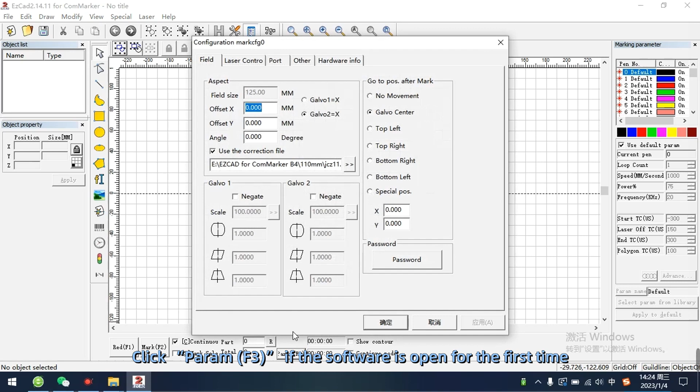Tick Use the correction file. Find the file ending with cor in the USB flash drive or that has been copied to the computer disk. Calibration of the software has been completed. The left side is the toolbar. It shows the function when the mouse is on the button.

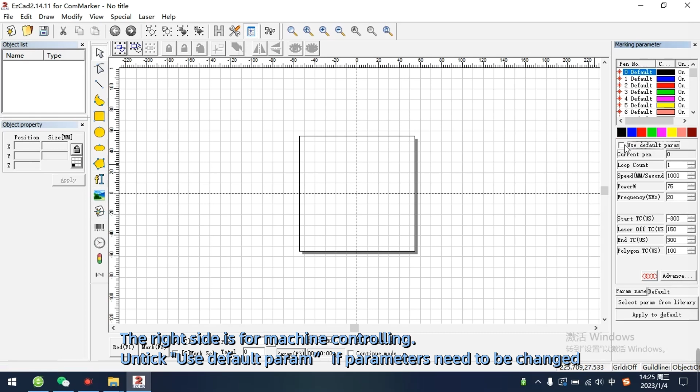The right side is for machine controlling. Untick Use default param if parameters need to be changed. We can modify the speed and power according to the engraving requirements, and other parameters do not need to be changed by default.

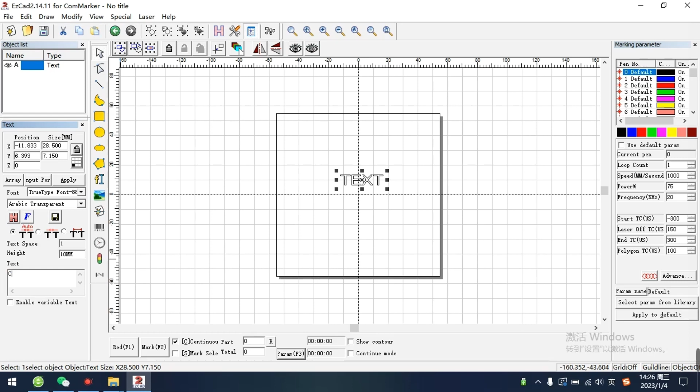Let's take text as an example for engraving. Input words in the bottom left corner. Do not forget to click the Apply button. Click the Put to Origin button if the text is not in the working area.

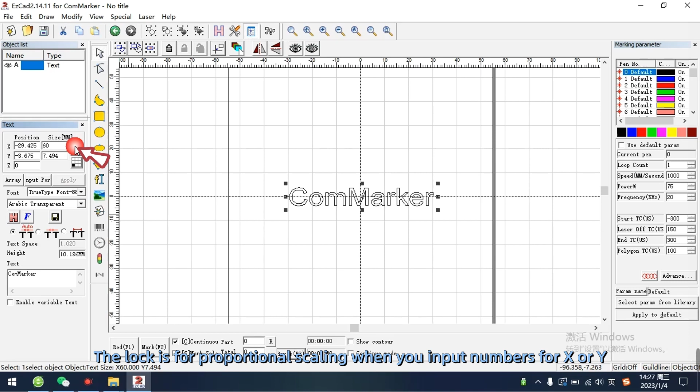The size can be modified here, and click Apply to change. The lock is for proportional scaling when you input numbers for X or Y. Font modification. The fonts are related to each computer system. Don't forget to tick Apply.

Make the text bold, italic, vertical, or change word spacing by clicking the F button. H button is for hatching the text. Set parameters for filling. Z-shaped engraving mode is commonly used with good engraving result. Line space is suggested to be input from 0.03-0.05 normally, which is determined according to the size of the text.

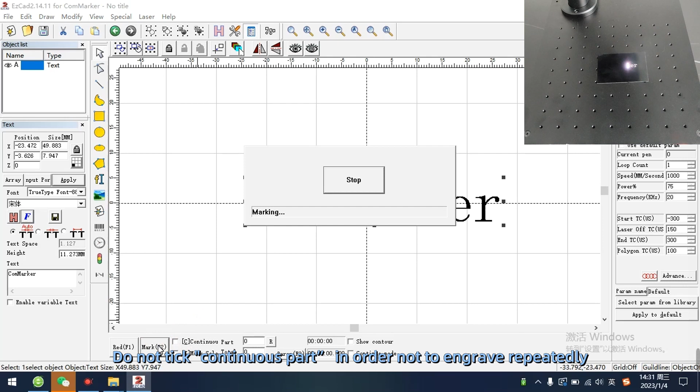Click Red to preview. The rectangle will be the marking area. Do not tick Continuous Part in order not to engrave repeatedly. Picture marking, click Draw bitmap file. It supports JPG, PNG, BMP, etc.

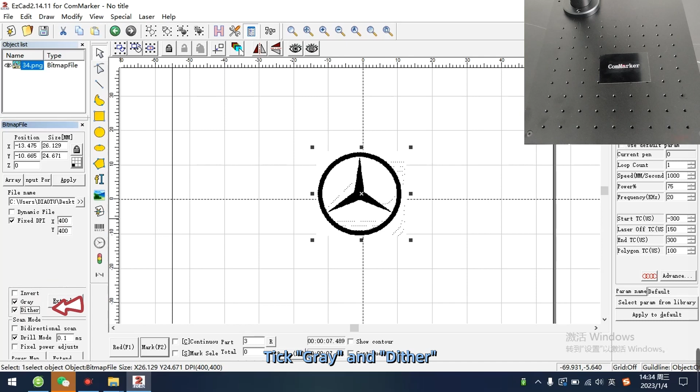Set the parameters for the picture file on the left side. First set the DPI, by default we can set X equals 400, Y equals 400. Invert the picture if necessary. Tick gray and dither. There are two extend buttons. Click the one on the top. The brightness can be increased to avoid black dots in blank areas being engraved.

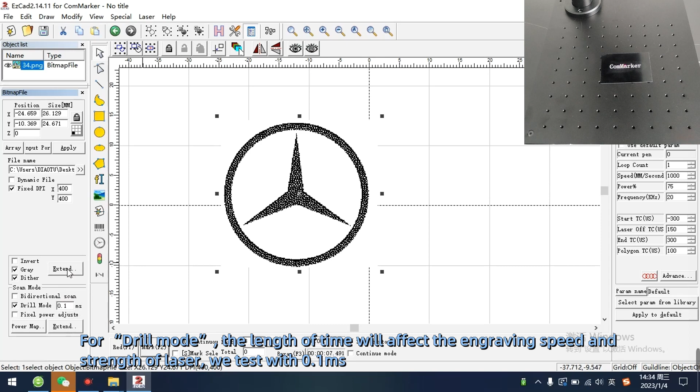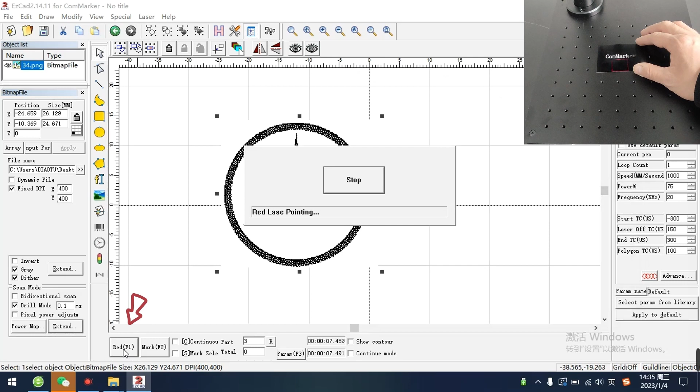For drill mode, the length of time will affect the engraving speed and strength of the laser. We test with 0.1 ms. If engraving a picture with a white background, it is needed to tick Disable Mark Low Gray Point and set the number 40. Click Red to preview. Click Mark to engrave.

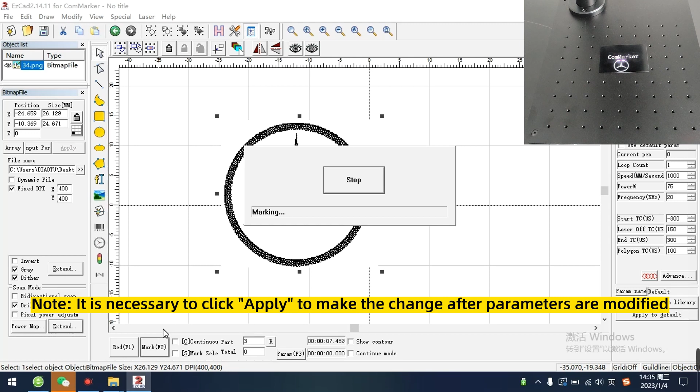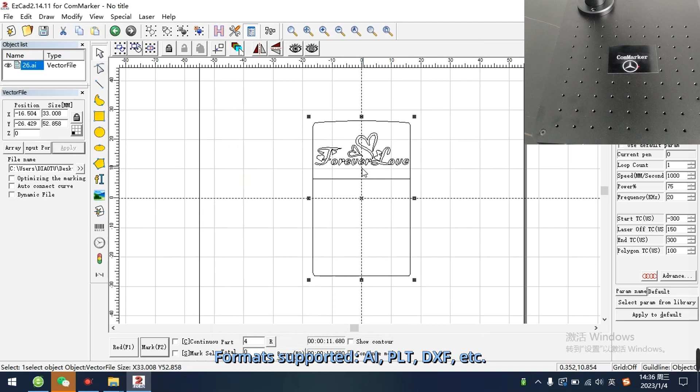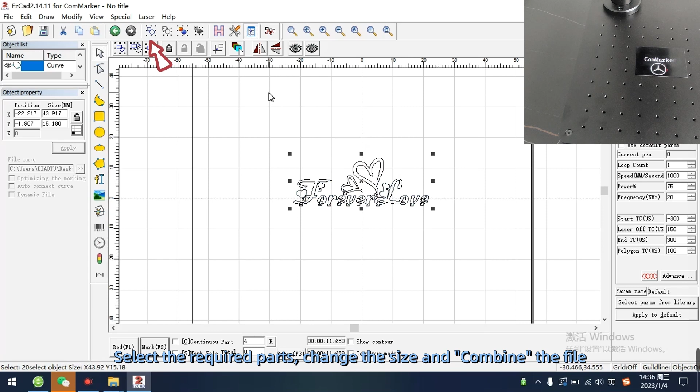Vector file engraving. Format supported AI, PLT, DXF, etc. Ungroup the file after importing the vector file. Delete unwanted parts. Select the required parts, change the size and combine the file. It also needs to be filled similar to text. Preview with Red and engrave with Mark.

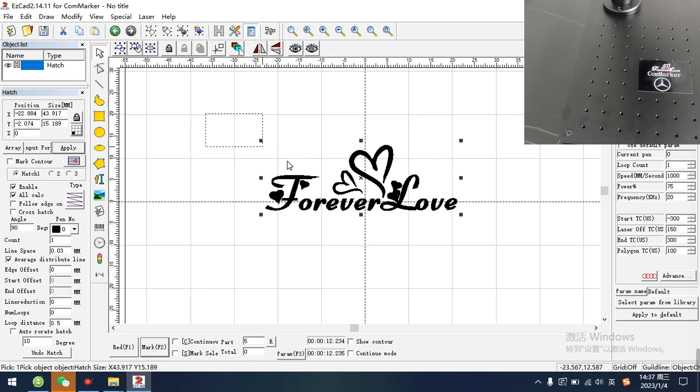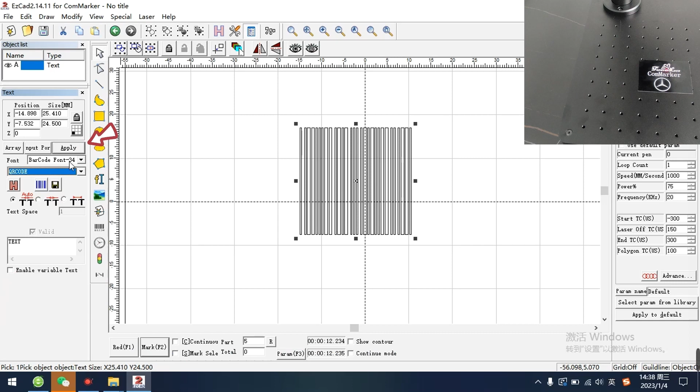Generate barcode or QR code. Select QR code, click Apply. QR code can be generated. Change the size if necessary. Click H to fill, same as text and vector file. Input the required content and click Apply. Click Red to preview, click Mark to engrave.

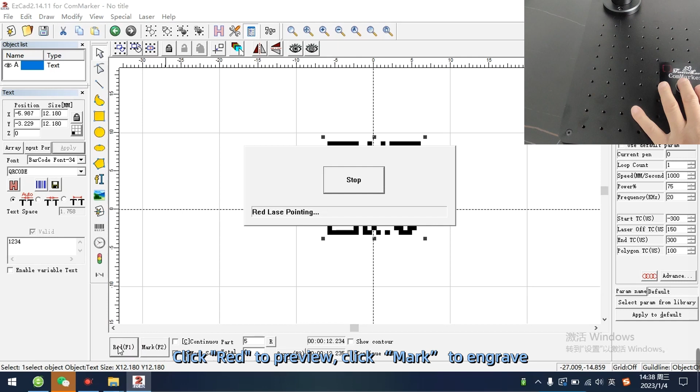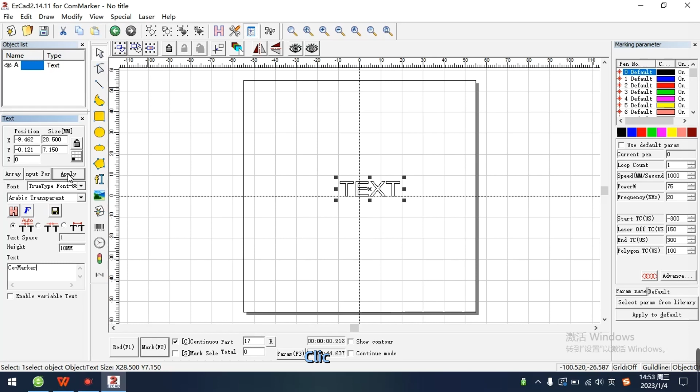Operations for the roller and rotary device. Take marking text as an example. Input a word, ComMarker. Click Apply. Place the text in the middle of the working area. Can drag and zoom the size, or change the size by inputting numbers. Fill with button H.

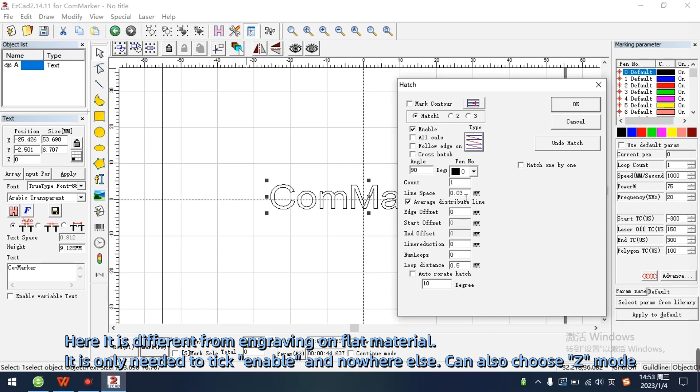Here it is different from engraving on flat material, it is only needed to tick Enable and nowhere else. Can also choose Z mode. Click Laser, select Rotate Text Mark. Click Param to set parameters, tick Rotate Axis. Use a ruler to measure the diameter of the object and input the number.

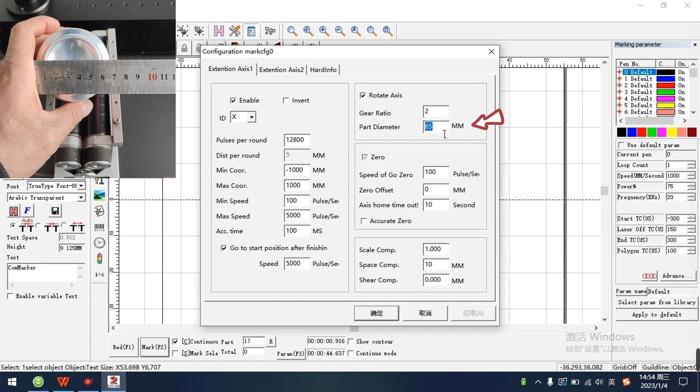Change the number of gear ratio, input a bigger number if the marking graph overlaps, input a smaller number if there are gaps. A small square appears after clicking. Red is the engraving area for a single character. Press the Esc key on the keyboard to exit preview. Click to start marking.

In order to better see the effect of the numerical change of gear ratio, let's demonstrate the following. It can be clearly seen that the space between each letter becomes larger.

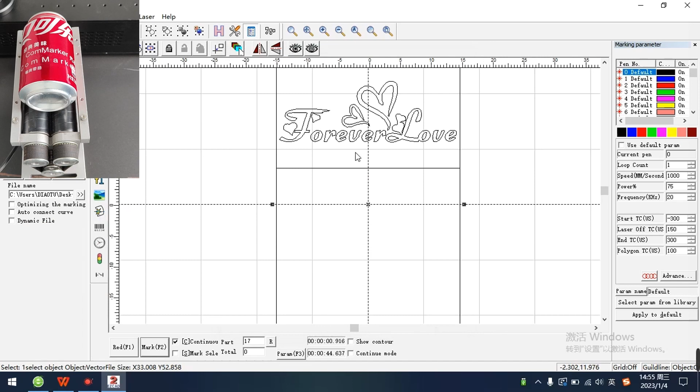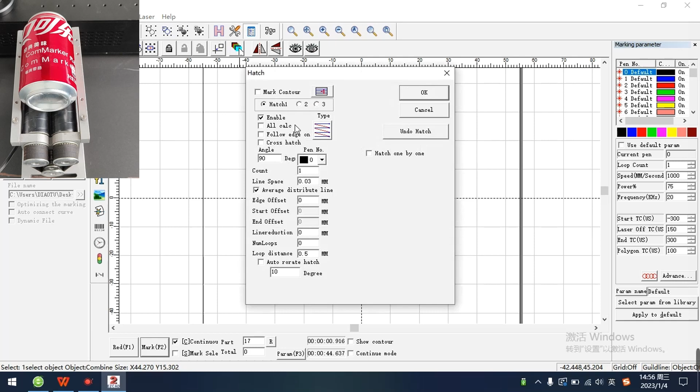Vector Graphics Engraving by Split Mark Mode. Firstly, open the file, ungroup the file. Delete unnecessary parts. Combine the file. Click H to fill. Parameter settings, tick Enable, the same as Rotary text engraving. Click Laser, select Rotary Mark.

Double-click to create a dividing line. The distance of the dividing line is determined according to the size of the object. Right-click to delete a line and drag with the mouse to move the line. It is needed to tick Mark by Split Line with this method.

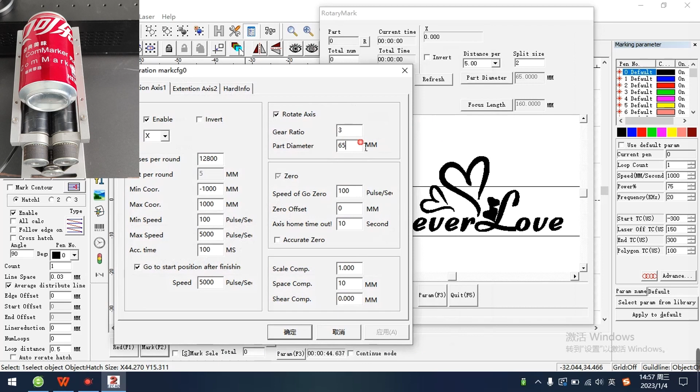And there is another way to control rotating by ticking Split Size without putting dividing lines. With different numbers input in split size, the results of engraving distance differ. Click Param, input the diameter number of the object. The size of overlapping area or gap of the engraved picture can be changed by changing the gear ratio number.

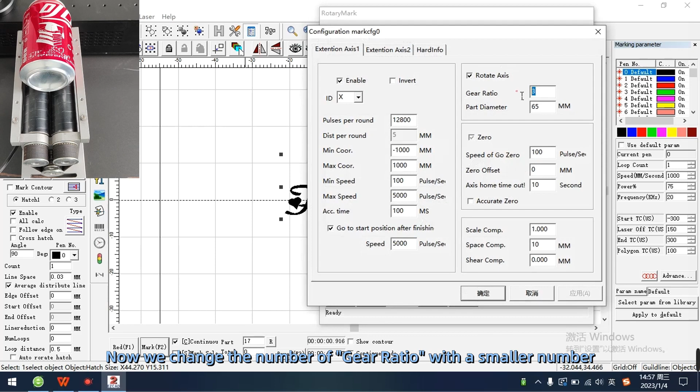Let's demonstrate the engraving result. We can clearly see that there are gaps instead of overlaps. Now we change the number of gear ratio with a smaller number. Different objects with different diameters need to work with different gear ratios, which need to be adjusted flexibly. Now we change the number of split size, and we can see that the width of the engraved picture has changed.

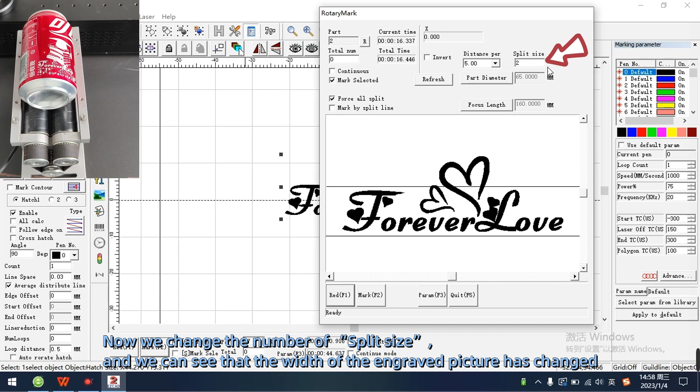Summary. 1. Accurately measure the diameter of the object. 2. Engrave text by Rotate Text Mark and vector graphics by Rotary Mark. 3. Change the gear ratio number to change the size of the overlapping area or gap of the engraved picture.